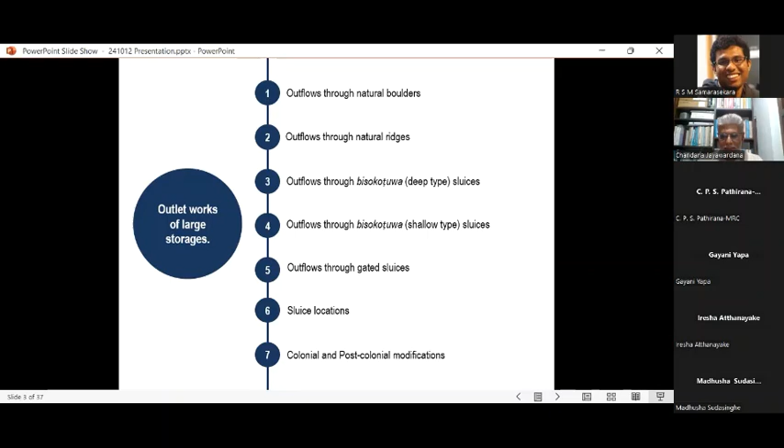Considering large storage outflows through natural boulders, some examples we can see even today at Sorabora väva, located at Badulla district. Rather than man-built works, the water outlet or outflow is taken through some natural boulders, naturally formed. There might have been some man-made modifications to this boulder formation, but basically it consists of natural boulders, with the water flowing out just in between two deep boulders.

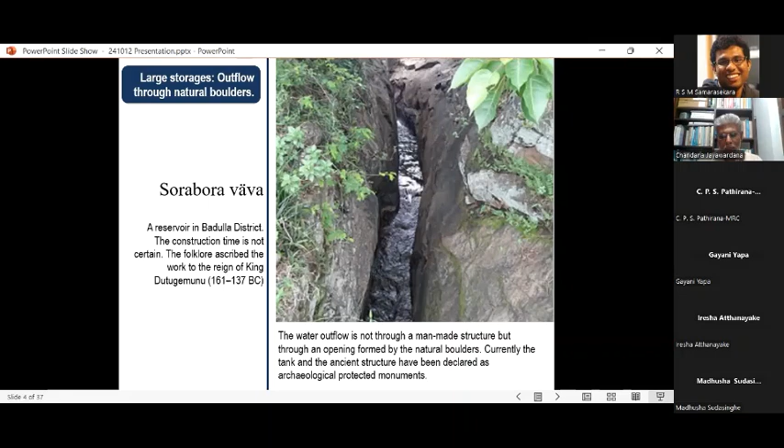The same applies to the Erupotana River, which is not as familiar as the Sorabora väva. Erupotana River is located at Mahakachikodia area in Vavuniya district, and it also consists of some boulders through which the water flow is taken out. So there are no man-made or human-involved modifications as such in both these sluices at Sorabora väva and Erupotana River.

So now we can mark one typology of ancient sluices as those which used natural boulders to form the water outflow. Another type is the usage of natural ridges, getting some kind of tunneling system through the natural ridges, which we can find at Maduruoya Reservoir.

Maduruoya Reservoir came to limelight because of its location, when the Canadian consultants designed the new sluice at the newly constructed Maduruoya Reservoir under the Mahaweli project in the 1970s and early 1980s. When they were digging the location to locate the foundation of the new sluice, they came across the remains of an early sluice at the very same point. So with that, this ancient sluice at Maduruoya came to limelight, and obviously this should be through a natural ridge rather than a man-made dam at this particular location.

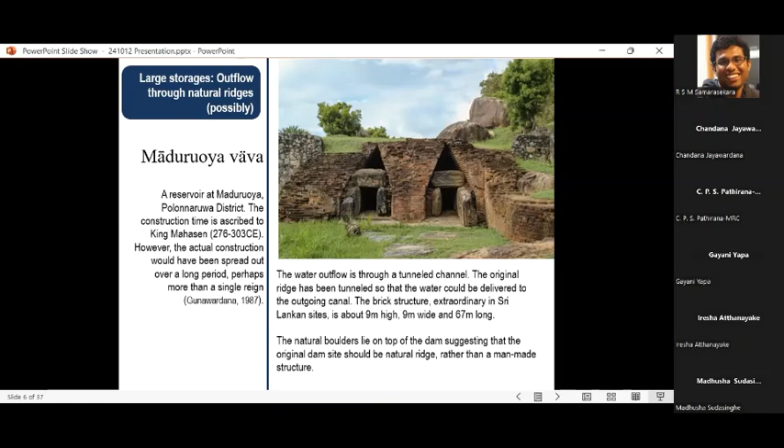You can see there are some boulders over the dam, which means the original position of this sluice would have been a natural ridge through which they might have constructed a tunnel from the reservoir side to the channel side, the other side of the ridge, and used that tunnel to get the water outside. The abnormal height we can see in this particular construction would have been due to the fact that they required working clearance within the tunnels and to locate the boulders to form the water flow. So this is another type we can find in our ancient sluice systems: the outflow through natural ridges.

So in between the inlet and the outlet of the Maduruoya, we can see a chamber in which one wall is provided with carvings said to depict a group of dancers. Today we can't access this chamber as it has been sealed by now, and the reason for the figures is not certain. Some say it may be due to ritual purposes, and there is no consistency between the ideas expressed by scholars and those with first-hand experience of this chamber. But probably they might have had some kind of devala in between the sluice, where they could have conducted rituals.

At the bottom side of the sluice, you can see the outcrop of the Maduruoya sluice. You can see there are two barrels. This is again a typical arrangement of the outflows we will see in slides to come. There may be one or two, maximum two channels, two barrels through which the water comes out.

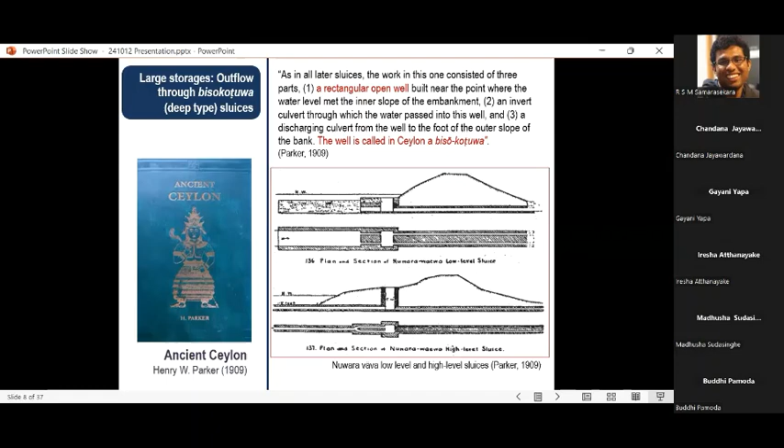In the lower side sketch, you can see the incoming barrel and the outgoing barrel, and the Bisokotuwa is located in between. This may be the clearest description of what we call today as Bisokotuwa, as recorded by Parker. Professor R.L.H. Gunawardana, also considered an authoritative person on the subject, has published work with detailed drawings and dimensions of the Wahalkada reservoir in its original condition. You can see that almost all Bisokotuwa sluices have a similar arrangement: an inlet barrel, an outlet barrel, and in between the two, this particular well called Bisokotuwa.

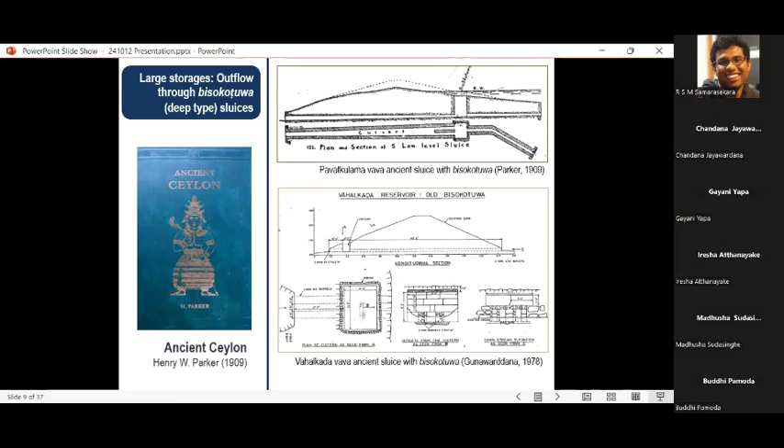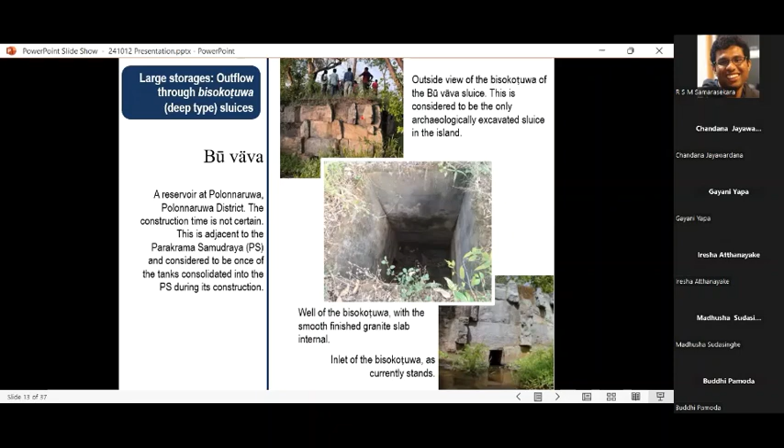This is one of the abandoned Bisokotuwas at Parakrama Samudra. Anyone can visit, but it is inside the jungle and a bit difficult to locate. Even the people in the vicinity are not aware of this particular Bisokotuwa. But if there's any chance, it is worthy to go there, because this is also a preserved type of Bisokotuwa, where the original arrangement could be seen.

This is the outside of that Bisokotuwa, so we can see what we saw at the Buwewa Bisokotuwa. The same arrangement can be seen in this Parakrama Samudra ancient Bisokotuwa as well. Other Bisokotuwas at Parakrama Samudra have been converted to new sluices, which we'll discuss in the slides to come, covering how these colonial and post-colonial modifications came into being. But these here are the original arrangements.

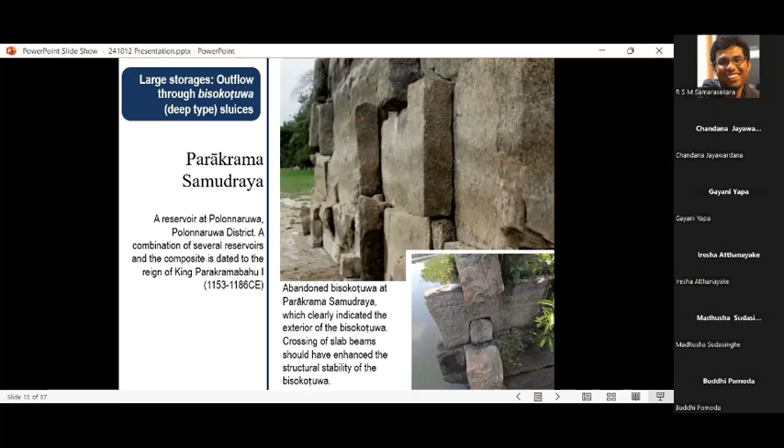So we can see the arrangement of the slabs, again interlocking each other. You can see in the photo at the bottom how each slab interlocks with the others so that the arrangement could be maintained under various conditions.

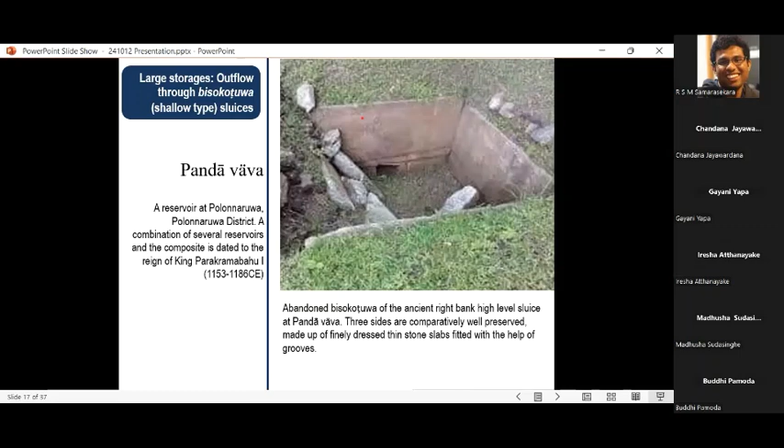But there are some Bisokotuwas, especially the one at Pandawa, which is at Paduasnuwara, that are not that deep. They are shallow Bisokotuwas, maybe 1 meter or 1.5 meters high. This type of Bisokotuwa can be seen at Pandawa, at Paduasnuwara, and again the Urusita at Ambilipitia.

At Ambilipitia, as I said before, the 7-hooded cobra figure at the Urusita is something very prominent. In its original state there were 2 cobra figures at the 2 sides of the barrel, but now only 1 cobra figure remains; the other has been removed to the Colombo Museum. You can see the counterpart of this particular cobra figure at the Colombo Museum. It is so prominent and so decorative.

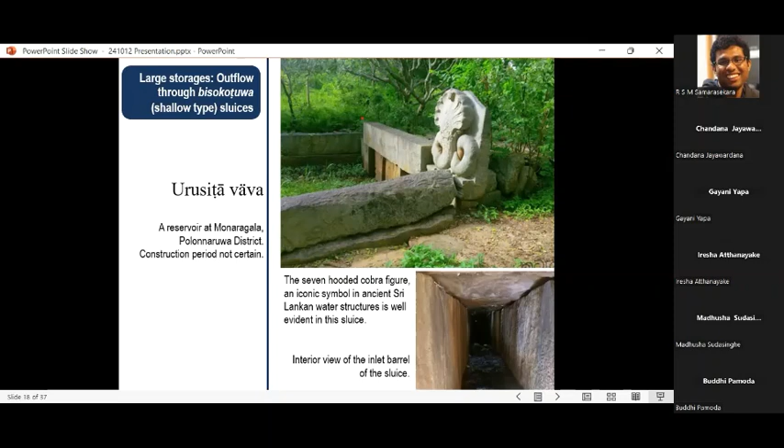Apart from the Bisokotuwa, the cobra hood figure itself forms a very admirable artifact. That should be the reason they have shifted it from the original site to the Colombo Museum. So that's another typology of Bisokotuwa, the shallow type Bisokotuwa.

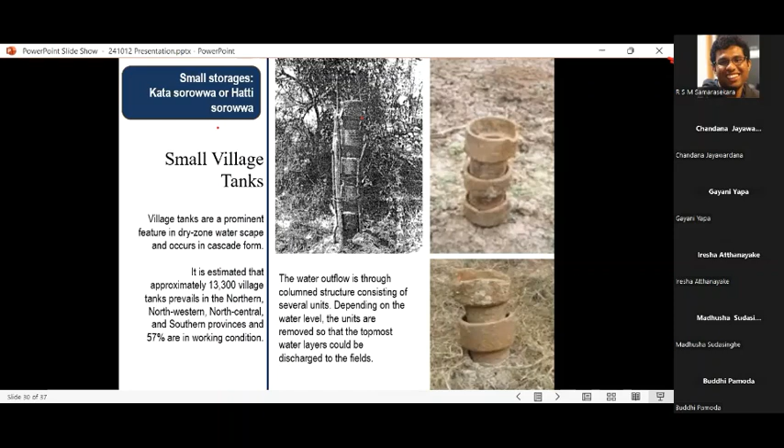During the colonial engagements with these village tanks, they followed the same arrangement, and they used well-burned clay units to form these kata or hatti sorowwa.

These are drawings developed by the colonial Public Works Department, before the 1890s. They came up with several types, saying this is the Murray type sluice - maybe some technical officer or engineer designed this particular sort of unit. They developed molds so that they could build these units, this kata-like thing, on a mass scale.

Because the demand was so high, and the PWD was supposed to supply the demand, they came up with methodologies for how to build and manufacture them really fast. So they built the molds, got the units out, burned them, and dispatched them to the areas where they were required. And this is the arrangement they put in place.

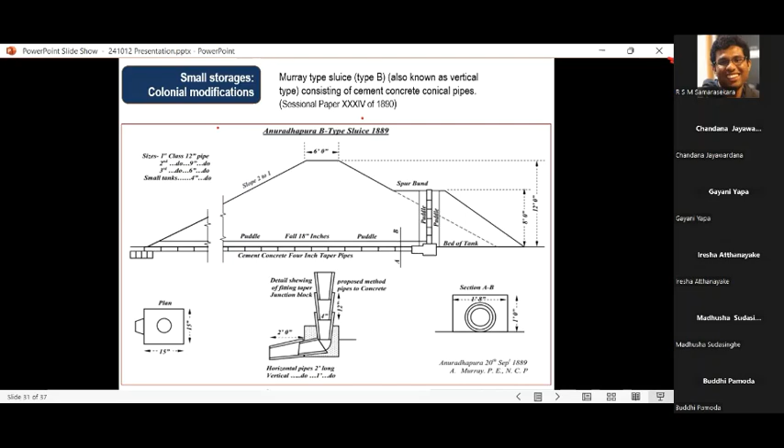This type of arrangement they followed in the early times, like the 1880s, but these were then replaced by plug type sluices and lifting gate sluices, because these kata, or rather the replacement of these units, was very cumbersome - you had to build them, transfer them to the site, and people had to work and install them.

Especially after demolishing the Rajakari system, according to the Colebrooke Commission, there was no one to maintain these village-level waterworks. So getting these sluices updated, renovated and repaired became a big task for the government.

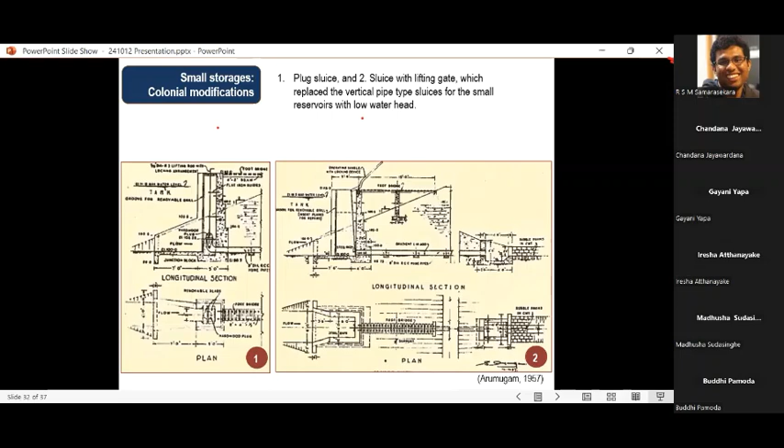So they were trying to come up with some kind of solution, and they discontinued this kata type or vertical type sluice arrangement, coming up instead with plug type sluices with lifting gates. These are permanent structures, so you can operate the gates while standing at the top of the sluice.

Then this plug type and the lifting gate type were also replaced by screw-type operated sluices, even at the village level. So you can see these type of modifications were done during the colonial periods, and these modifications continued into the post-colonial periods also.

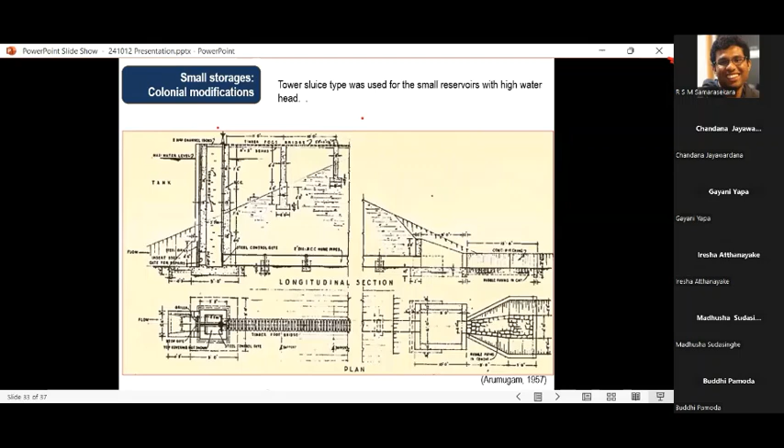So now what we can see is gated outflows, either from the large storages or from the small storages. Just summarizing things: considering our ancient works, there were no generalized applications, but location and outflow-volume specific applications. Depending on the location of the sources, they used separate technologies, separate arrangements, separate constructions, depending on the location and the amount of water released through these sluices.

Basically, these were not controlled outflows, but level-based outflows - once the water level reached the sluice level, water was released. There are volumes of technical explanations needed for this second point, which I am not going into in detail, but rather than controlled outflows, they were level-based outflows - more or less like spills.

Third point: this does not comply with certain social theories that were built up, such as the Asian mode of production by Karl Marx and Oriental Despotism by Karl Wittfogel, which claimed that in Asian countries there were hydraulic civilizations and hydraulic empires, where waterworks were used to control the general masses.

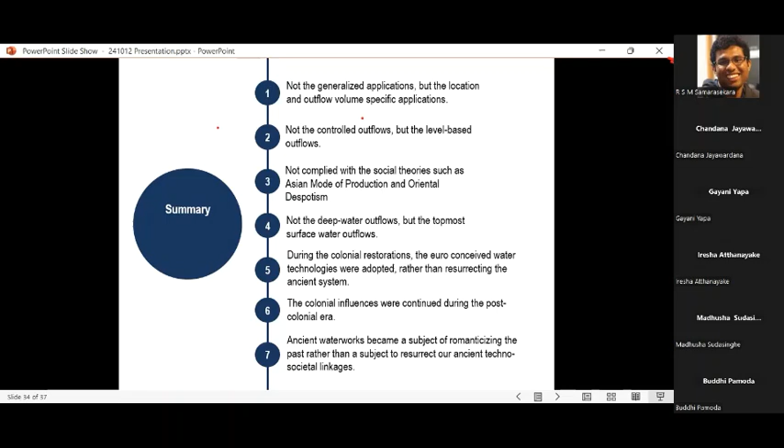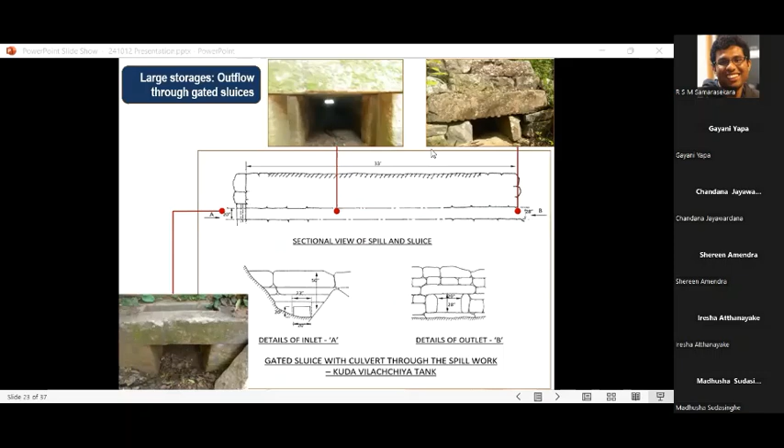So even the spill I showed you at Kuda Vilachchiya, you can see large boulders placed one over the other in a nice manner. So these works would have been extended for kilometers and kilometers.

So there would have been a very large amount of human labor going into this, as well as some machines, maybe the basic forms of machines they have used. I think levering is there. Levering should be there, and the other thing...

There are two components: the transportation and the placing. For both those processes, there might have been two basic applications they used. One is the lever mechanism, and the other is they might have used animal power, like elephants, to its maximum.

So this is another area we need to explore, because without such abilities and without such potentials, they wouldn't have started these works. The people who started these works should have had some kind of assurance that they can handle the project within a reasonable time.